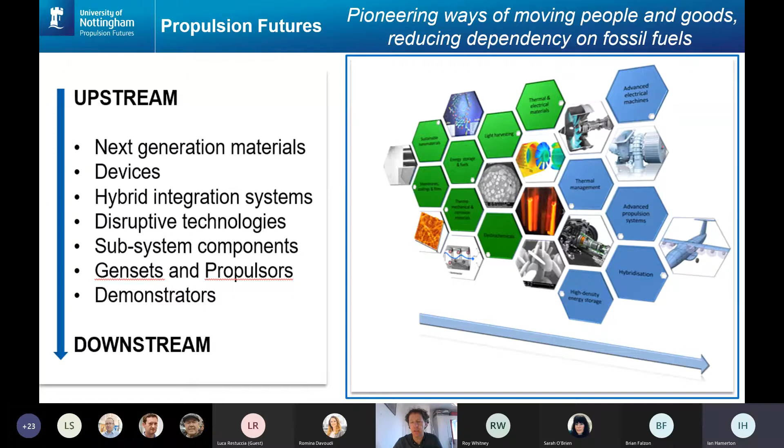So just to give you a few more details about the Beacon. As I said, it's funded by the University of Nottingham. We've recruited several postdocs and technical personnel. You can see some of the facilities here. We're also obviously very closely related with the Power Electronics and Machines building, which is being built on Jubilee campus, if you know the campuses of the university.

That's a big initiative that's going on here in the university. We also fund lots of internal projects, and we also fund prime projects. One of the main objectives from the beacons is to raise funding externally as well, so we provide match funding for those things, and also buy specialist equipment here that's unique to the university and that can help with our research capacity.

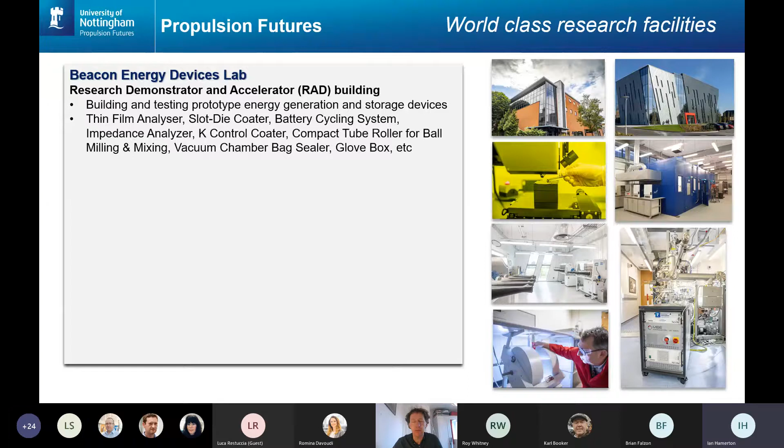Thinking about those facilities, some of those are in the Research Demonstrator and Accelerator building, which is this building up here. And then we've got all of the things you can see listed there. I think especially thinking about thermoelectric materials and battery materials there, we've got some really nice new installations going in. And then there's the Advanced Materials Lab in the ITRC building.

There's the liquid processing platform, liquid plasma processing platform, high energy ball mill, arc melters, resonant mixers and spark plasma sintering. And then more fundamental research facilities in the School of Physics, so an MBE machine there, and also equipment for characterization of nanodevices. And in the School of Chemistry, some facilities for characterization of paramagnetic materials.

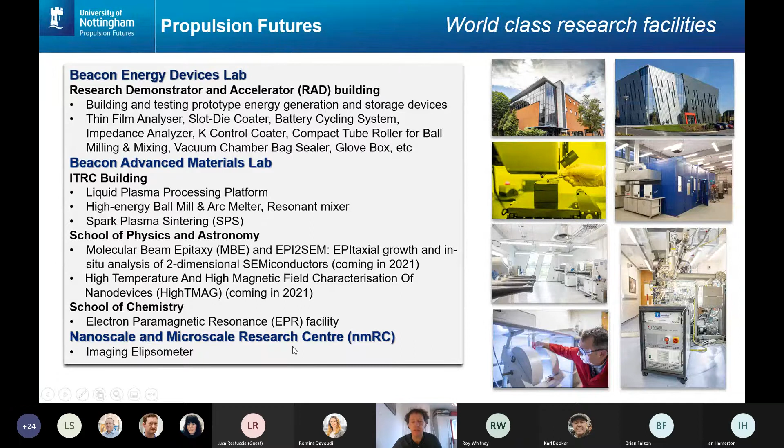And then also here in the university, we've got the nanoscale and microscale research centre, which many of you will know is a multi-faculty facility that acts as a service for all kinds of spectroscopies. And in particular, there's an imaging ellipsometer, which the Beacon funded.

So our aim is to connect, collaborate and innovate. We promote that through targeted seed corn funding, provide access to facilities and provide in-kind support. And those projects are approved through the Beacon board, on which I and Director David Grant sit. That's the governing team there.

So let's quickly get to today's topic. Sustainable materials for propulsion systems is the broader topic. Within this, we're exploring greener materials for propulsion systems and incorporating them with new chemical engineering processes. Those include multifunctional organic and inorganic structures, insulation, conduction, nanostructured composite materials, coolants, membranes, and coatings.

We'll hear today about some of the things going on in the university from some of our academics, and we look forward to those talks. Especially, I'm really looking forward to our guest presentations who'll start now. So that's the end of my presentation.

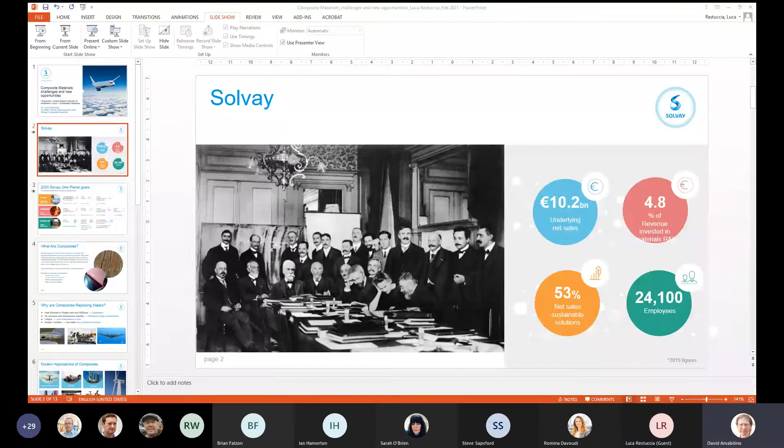So going forward, we can start talking about composite materials now. Let's start with the standard definition. So what are they made of? They are made of two different constituent materials that are significantly different in terms of physical or chemical characteristics. But when put together, they still stay as distinct and separate components, but act synergistically to create something that has much better and superior performance.

So this is a big difference versus mixtures, alloys, or solid solutions. In nature there are plenty of examples, starting from wood, which is made of lignin and hemicellulose. Bones, seashells, granite - nature has already created some optimized structures which are composites. Going to engineered, man-made composites, simple examples everyone knows: reinforced concrete, ceramic matrix composites, up to what is more interesting to us: fiber reinforced plastics, and more particularly in this case, carbon fiber reinforced polymers.

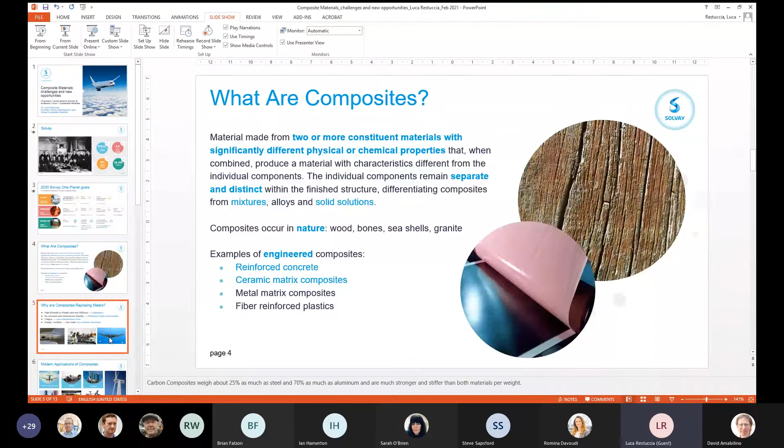So if we look today at the advantages of composites versus metals, and why they have been and continue to replace metals in multiple applications - starting from the more traditional advantages - clearly composites have an extremely high specific strength, which is the strength to weight ratio, and great stiffness. So in general they have really good performance, but at a fraction of the weight of other metals such as steel or advanced metals like aluminum, and this helps a lot in designing and manufacturing lightweight structures.

Now, conversely to what normally happens for metals, clearly they're not subject to corrosion, and they are extremely stable dimensionally, and this allows them to withstand really tough and harsh environments - big changes in conditions from cold dry to hot wet conditions for multiple cycles throughout the life of an aircraft.

They are not very prone to, or they have no fatigue propensity. Now, what this means—we have an example at the bottom of this slide, an infamous picture of an Aloha Airlines 737-200 that in 1988 experienced an explosive decompression and separation of a large section of the top of the fuselage. After investigation, it was linked to maintenance, yes, but also clearly linked to the propensity of the metal to corrode and to fatigue, creating bonding issues at the lap shear level that caused this huge, catastrophic event.

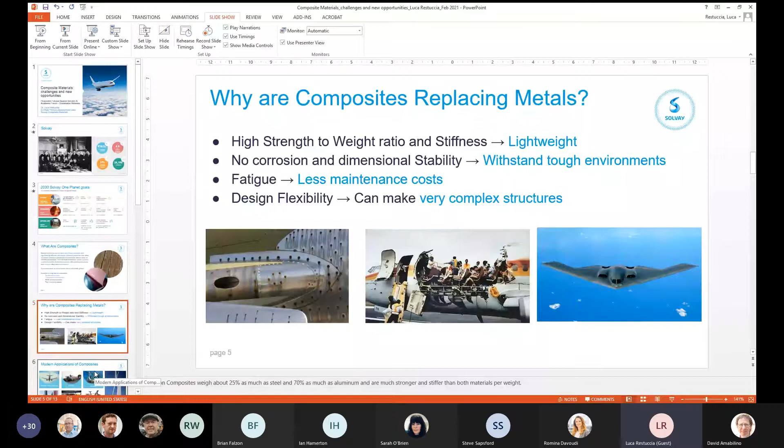All these technological advantages have helped composites earn their way into a number of modern applications. When we talk about modern applications, I'll start with the ones closest to our business, or my part of the business: aerospace, defense, and space. In this case, the traditional advantages of composites really found fertile ground, with a massive and growing adoption of composites over the years.

If we look at marine applications, such as America's Cup boats, stiffness and lightweighting are essential, and people striving to achieve the best performance are looking to composites to be more competitive in these tough competitions.

There is a good portion of composite materials in motorsport and supercar applications. Now, this is clearly linked to the traditional advantages I mentioned before, lightweighting, but not only that. I'll give you an example: composites have unique characteristics—they're really efficient in high-speed crashes and fail in a controlled way. The adoption of composites in specific parts of Formula One cars has dramatically improved the safety of drivers in recent years.

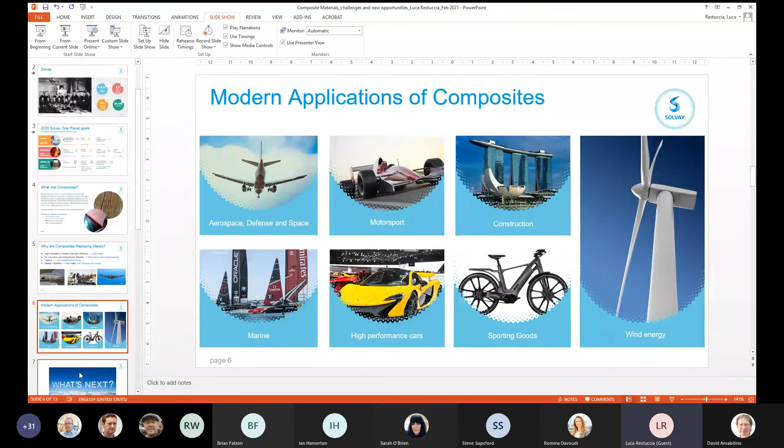But let's see what's next—what can come next. It's really clear in the industry that composites can be an absolute enabler to multiple frontiers of progress in multiple markets. Starting with electric vehicles, whether cars or planes, the ability to make flexible shapes that are lightweight and stiff are all enablers for vehicles currently carrying relatively heavy batteries.

Hydrogen propulsion—there have been lots of talk recently about the use of hydrogen, especially for aerospace applications. This is where composites can really help.

Hypersonics—when we talk about defense, one of the new frontiers of warfare is hypersonic weapons that can fly at 15 to 20 times the speed of sound. This is where composites are a big enabler due to their thermal management characteristics and, clearly, lightweighting.

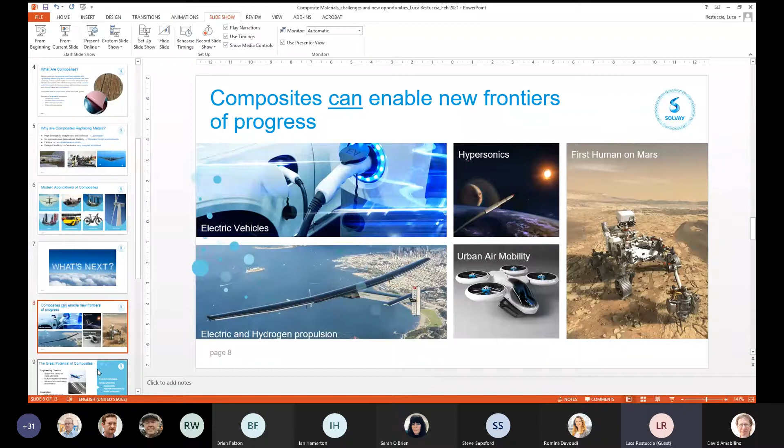Now, we have been talking about enablers for new potential frontiers. So what needs to happen in order to deliver this potential?

Going beyond the traditional benefits I listed before, there are other potential advantages from the use of composites which are either not well understood, used in other industries, or not well utilized by our industry. I can summarize these in two main categories: engineering freedom and integration.

When we talk about engineering freedom, I like to use an example. If we consider large commercial aircraft, the selection of composite materials for wing applications of the 787 or A350 clearly benefits from the use of lightweight products with traditional advantages, but composites also allow creation of aerodynamic profiles that in reality allow these planes to save lots of fuel, among other things implemented.

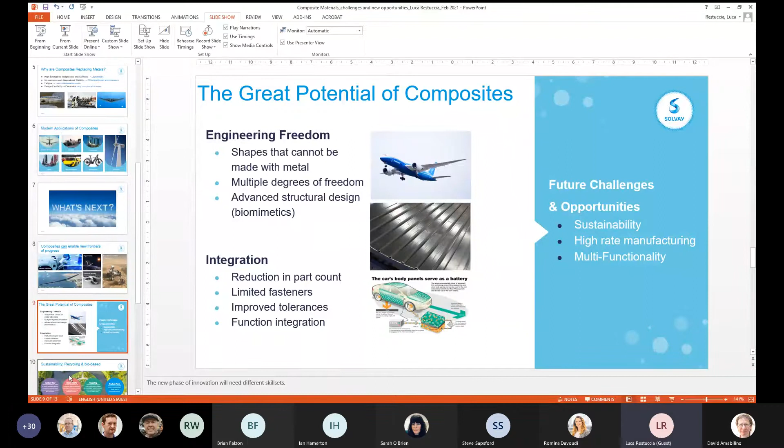I believe only a small portion of all this potential has been exploited today. I'd like to add a bit more to this presentation, talking about future challenges and opportunities, focusing only on a few of them and not capturing them all. I wanted to start from sustainability today, starting from what in our industry is the perceived dilemma of sustainability.

Composites are extremely good for sustainability in the sense that they are lightweight and therefore allow structures to be really fuel efficient. Conversely, by definition, they are really difficult to recycle, especially when we're talking about thermosetting based composites. So in this case, what are the opportunities?

Starting from carbon fibers, there are opportunities to look at biosource or bio-derived precursors for acrylonitrile and polyacrylonitrile, which are clearly the precursor of carbon fibers. Similarly, there are opportunities to look at manufacturing processes for carbon fibers that are a lot more energy efficient. Today's methods clearly require extremely high temperatures and times, and energy consumption is not really efficient.

Then looking to other building blocks in our composite resin matrices, there are opportunities to look for sustainably derived or bio-derived monomers, which can be formulated in order to create the right balance of performance.

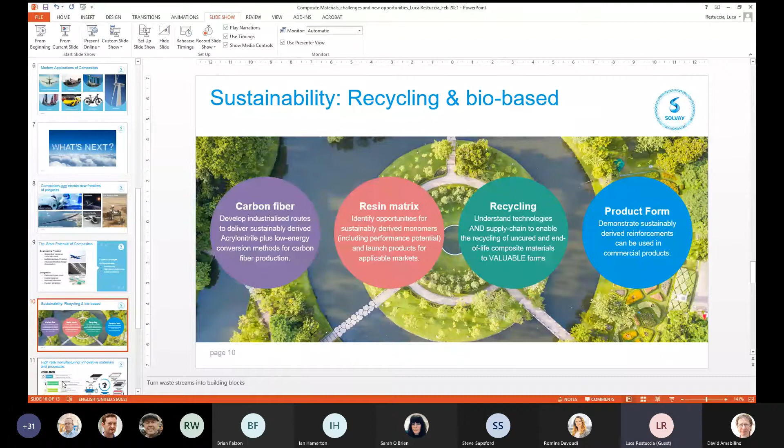Last but not least, we can consider opportunities to create new product forms from recycling or from sustainable sources in order to use them for other applications. For example, potentially turning some of the waste streams from this industry or another industry into usable building blocks. So there are lots of opportunities there.

The second one I'd like to talk about today is high rate manufacturing. Clearly the aerospace industry is rapidly shifting toward an industrialization phase, which will require a real leap change in the ability of materials and manufacturing processes to meet very high production rates.

Materials, in some cases, will have to be capable of very short takt time, and manufacturing processes will have to be fully automated and capable of those rates. So well integration within the cutting, handling, forming, curing, NDT processes in a very well automated process.

So to give you some examples about what Solvay has done in this area, CYCOM EP2750, which is a toughened epoxy system, which has been designed to offer some unique benefits to manufacturers, starting from its high rate capability and ability to be used and developed to be perfectly suitable for fully automated process trains.

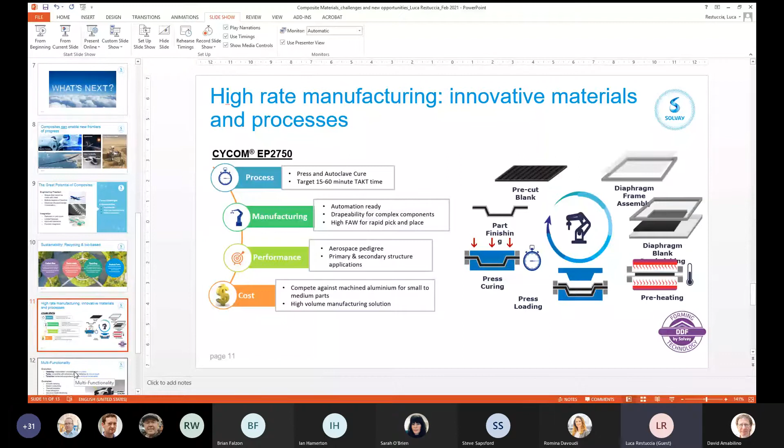The last slide I will share with you is looking at multifunctionality. So if we look at how materials were used in the past, we're talking about monoskilled composite in the sense that the only function was to carry load. Today, through all the level of freedom that I mentioned before, there is the possibility to have materials with enhanced and tailored thermomechanical and physical characteristics, which allow to reduce weight and provide some other advantages to designers.

Clearly, when we're talking about acoustic and vibration damping, composites are inherently stiffer, do behave differently versus metal, and these at times can create discomfort in passengers, in aircraft cabins. Now, some solutions have been developed in that sense in order to mitigate or eliminate that problem.

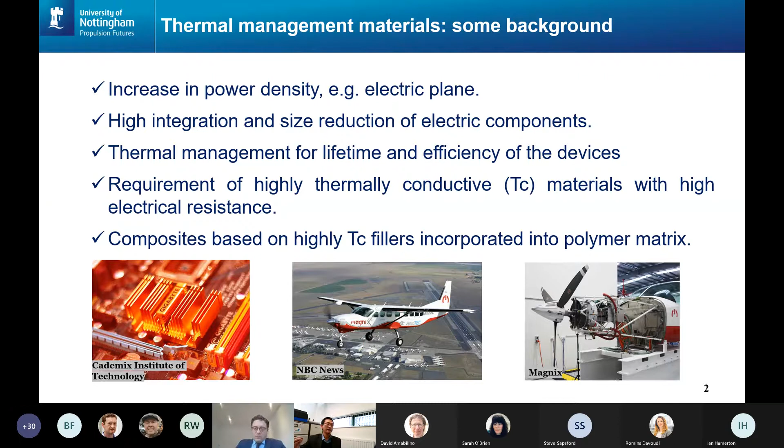So our idea is to think about how to change the polymer matrix by adding high thermal conductive materials. We call them fillers. The key challenge, as I mentioned, is not only high thermal conductivity, but also high electrical insulation. Normally for this kind of application, we need the volume resistance to be around or even higher than 10 to the power 14 ohm centimeter. Because of this requirement, it really limits our selection of fillers, matrix, and also selection of the process.

So our research team is the Advanced Materials Research Team. This is our main group, and it also involves power electronics, the School of Chemistry, and also nanoscale and microscale research centers at University of Nottingham.

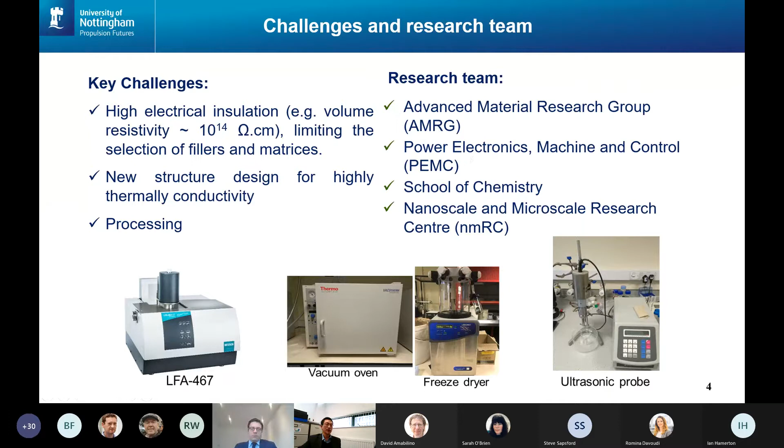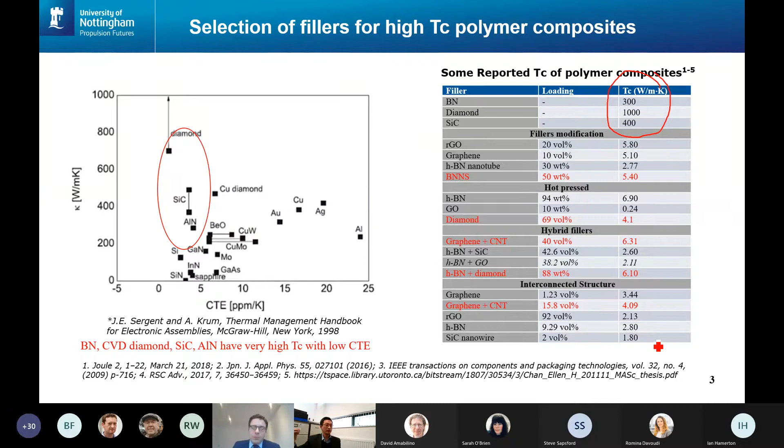So once the filler is added to the materials, it really depends on the distribution and how the different fillers connect. If we think about needing high thermal conductivity, first we need the filler itself to connect with each other, like a bridge, so we can have heat transfer much smoother and more direct, rather than having a gap. Secondly, there's the question of whether we need alignment of the filler or random distribution of filler inside the material.

Here it's very straightforward - with alignment, we have more chance to have a straighter functional pathway and higher efficiency compared to randomly distributed fillers.

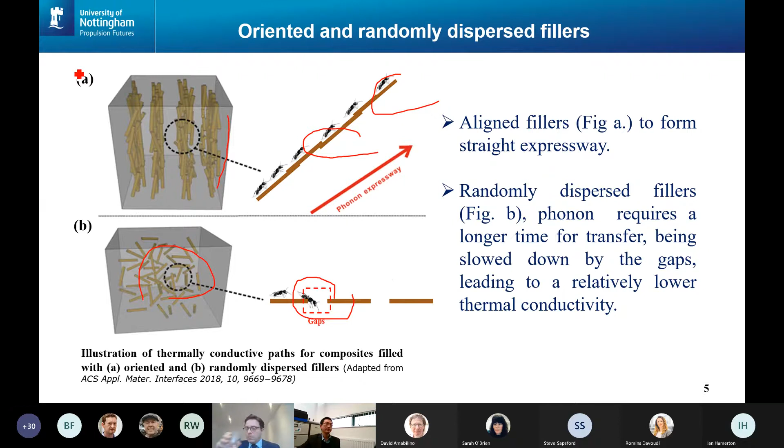So think about how to do this kind of filler alignment. There are different methods that can be used - either using an external electric field or magnetic force, or sometimes people even use a shear force method. If we think about using electric or magnetic field, under this external force, we have to make our filler itself become electric field active or magnetic field active. Then we can do something there, but the problem is that when we introduce additional ions or additional particles, that will affect its electrical resistance.

So another way is to use this shear force method. The most popular shear force method is melting the polymer, or dissolving and dispersing these particles inside the polymer, then doing extrusion together. That can help with alignment of the filler, but one issue is that the contact between fillers is difficult to control.

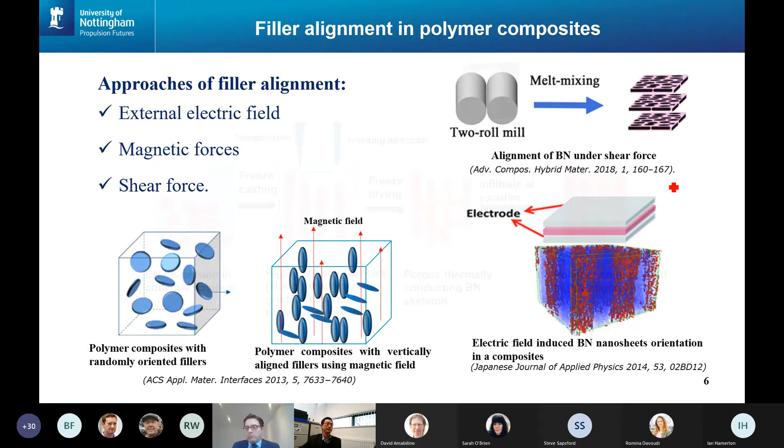So the method we chose is called the ice template method, or sometimes also called the freeze casting method. First, we try to produce a dispersion of hexagonal boron nitride - putting these boron nitride platelets inside a water-based solution. After that, we put this container in a very cold chamber, and at the bottom of the chamber it's cooled by liquid nitrogen. Then we can create a temperature gradient, with the bottom very low and the top slightly higher. Because of this high temperature gradient, ice starts to grow from bottom to top, in the direction of ice crystal formation.

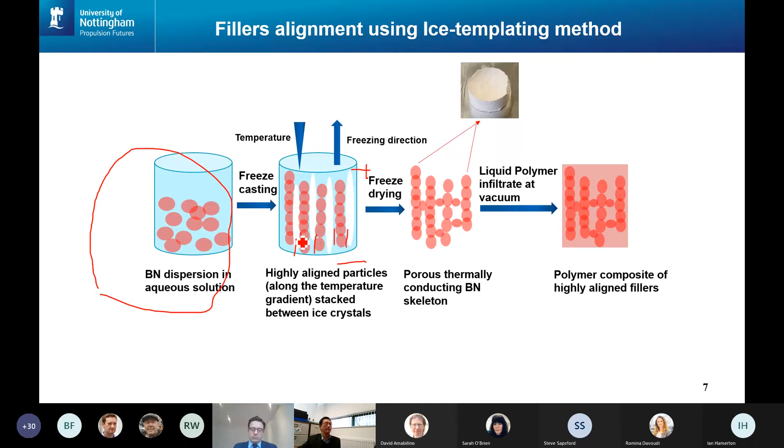During this procedure, the particles placed inside can change or slightly tailor themselves to fit the ice crystal, and finally the alignment is achieved. So this is how it works.

These structures we call aerogel. After certain treatment, we can get this very porous aerogel structure. You can see here its alignment of boron nitride platelets. Here is an enlarged image along these directions.

After that, one way is we can directly do impregnation with polymer, for example epoxy. As you can see here, this is a randomly distributed skeleton plus epoxy, and this is aligned boron nitride plus epoxy.

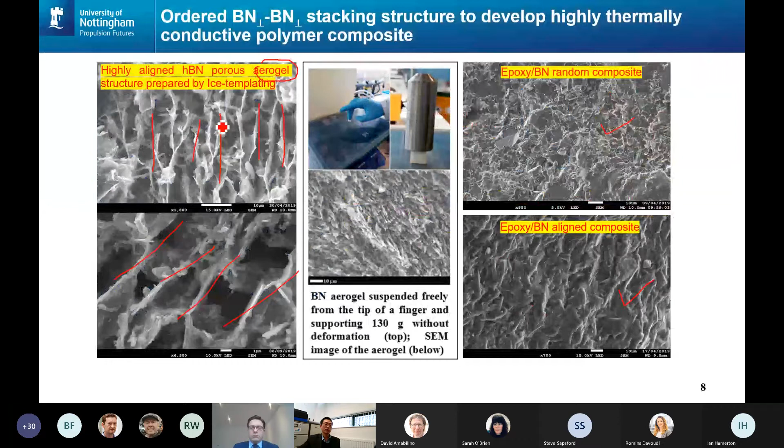But we think of this as just physical contact, as shown in the image. So we considered whether we can make it more solid. One method is to try a little sintering of this porous aerogel structure, to link the interface or boundary more strongly. Under this temperature, interfacial diffusion happens, linking the boron nitride platelets together, which increases thermal conductivity significantly.

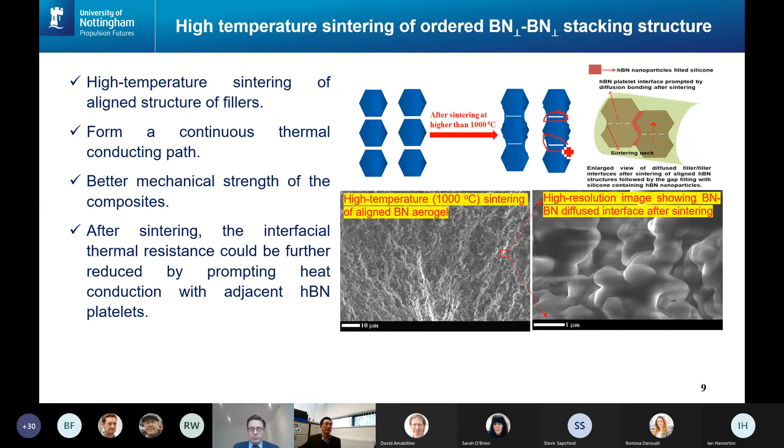Here is the data comparison. The black color represents epoxy filled with boron nitride in a randomly distributed composite. If we change it with a little alignment, you can see the difference. This is with 18% volume fraction.

This is one method. Another method is sintering this aligned boron nitride skeleton. Especially at 1000 degrees, you can see it makes a huge difference, increasing from about 1.2 to approximately 3.

To promote sintering, another method is to add some nanoparticles. These nanoparticles stay at the interface of the big boron nitride platelets. During sintering, the nanoparticles help diffusion bonding between the two platelets. Finally we achieve a value of 3.5 watts per mK at 32% volume fraction, while also maintaining electrical insulation, keeping volume resistance slightly higher than 10 to the power 14 ohm centimeter.

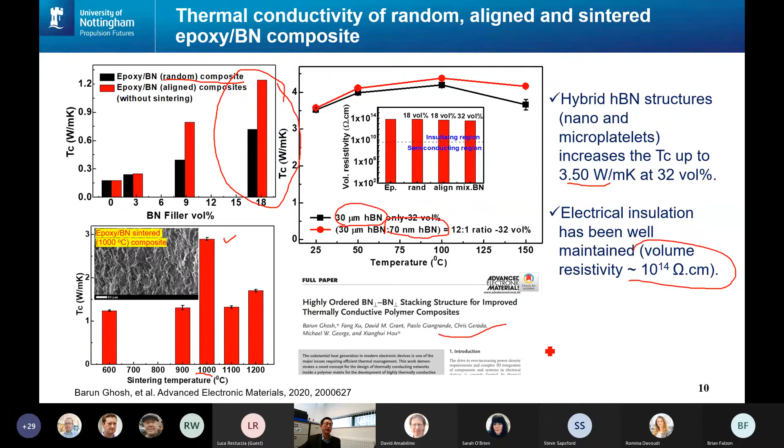We have a recent publication on this. This method is mainly for bulk materials. We've also developed another method for large scale, flexible membrane or film formats. We combine a few layers of silicon carbide and boron nitride together. This design achieves very good thermal conductivity while also offering very good dielectric properties, much better than commercial polyimide films.

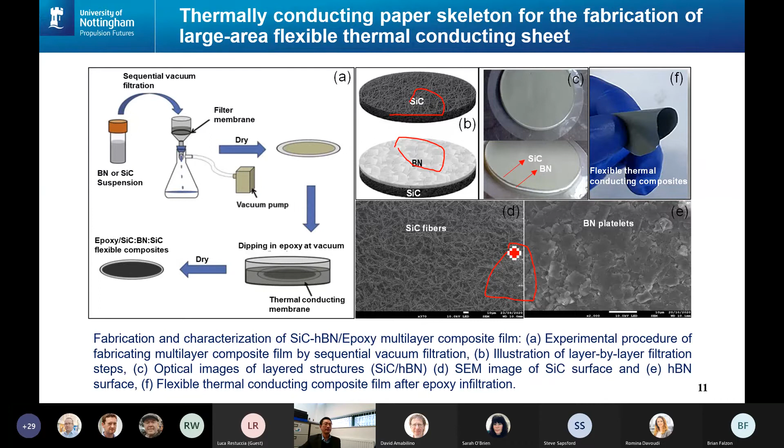This work is still under development and has not been published, so I won't report particular data here, but if you're interested you can email me. In conclusion, two types of thermal conductivity materials have been replicated. The main story is trying to reduce the interfacial thermal resistance of these porous structures, either by sintering or by adding thermal conducting substance at the joint positions.

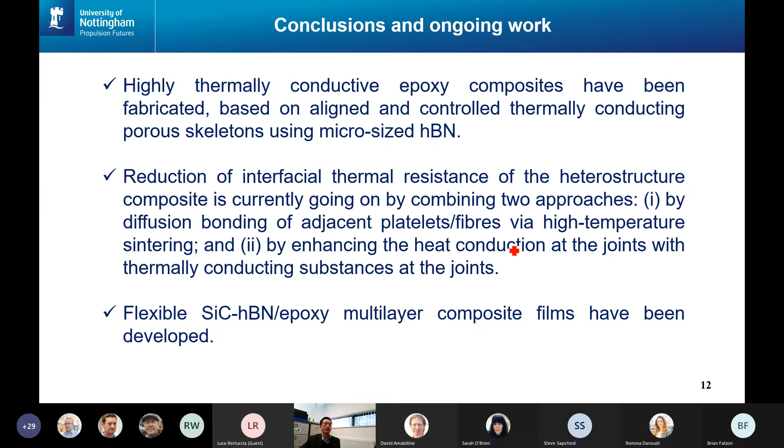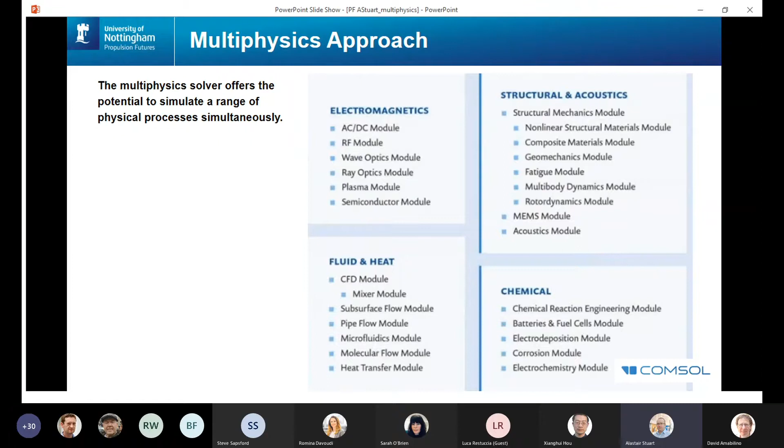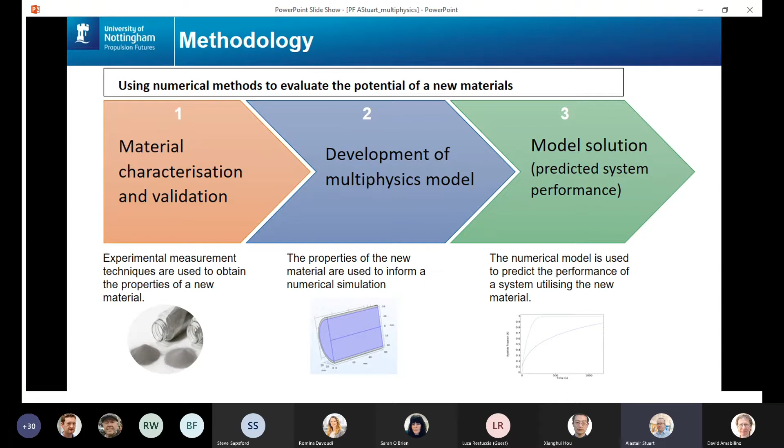So apologies for that. Just to quickly recap, I've shown here on this slide the physical processes that are available in this particular package. There are other packages you can use, and there's a list there of what can be applied in terms of the mathematical modeling. I think this is the slide I'd got to, so I was explaining the methodology in which you would characterize a material. You would then develop a multiphysics model, and that would give you a solution which would allow you to then think back about how that material would perform in a specific application.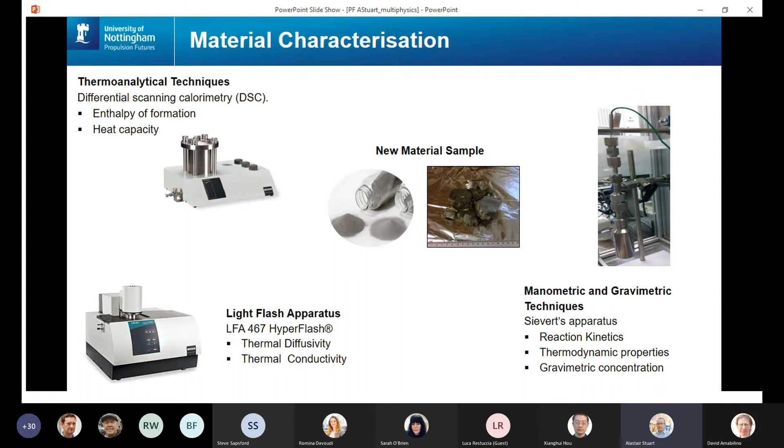And then this is a reaction of this alloy with hydrogen - we're going to store hydrogen in the alloy. So we're interested in the reaction kinetics and the concentration of hydrogen that can be obtained. Using these experimental techniques, we can characterize the material, which gives us material properties. I would then set up a model in a solver.

I'm showing on the right-hand side my material placed in a metal container, which I've connected to a hydrogen source, perhaps an electrolyzer. There's a flow rate of hydrogen coming into the material, and the material is designed to react with the hydrogen and become bonded. This is a way of storing relatively large amounts of hydrogen in a small volume, so we're thinking about energy density here.

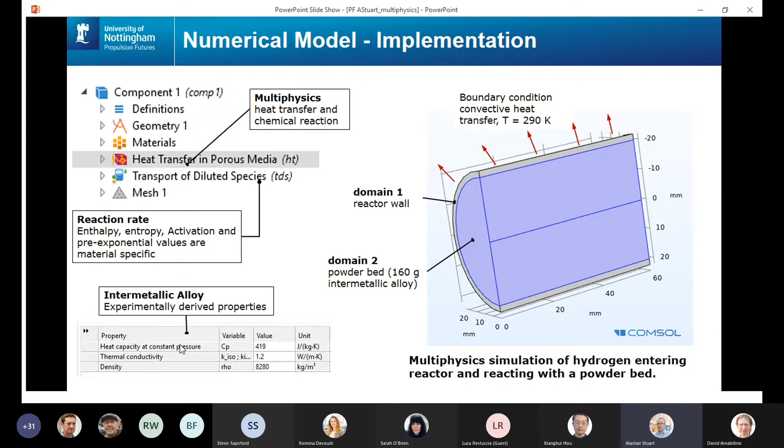I then go on to obtain a solution. On the left-hand side, the solver has predicted what will happen as the hydrogen transfers into the container. It reacts with the alloy and becomes bonded with the metal, and as it does so, the concentration of hydrogen in the alloy is increasing—that's this blue curve I'm showing over time. I've called it hydride fraction, but it's essentially the concentration of hydrogen, and you can see it has a particular shape.

What's happening in the container? There's a temperature difference. I've given you a plot of that, and through this temperature scale you can see it's hottest in the middle, and as we get towards the walls of the container, it's reaching the cooling temperature, which was about 20 degrees, about 290 Kelvin. The solver is revealing how the material will perform. I've not had to make the material or build a prototype, but so long as my inputs have been correct and I've used the physics correctly, I now have some idea of the potential of this material for this application.

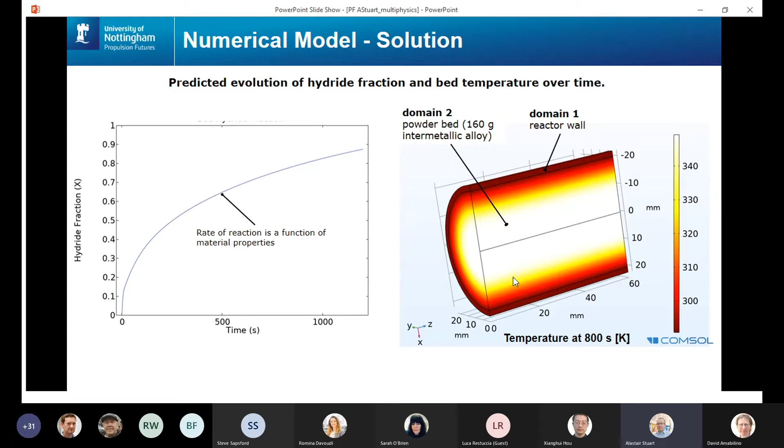I can see here that there's an issue of heat transfer—this reaction is very slow, and I might be trying to meet a certain rate of hydrogenation, because I'm coupling this container to, say, an electrolyzer. So I can then think about how to improve this.

For this example, I'm going to use some fins, made out of ECOPHIT F, which is an expanded natural graphite. Fortunately the manufacturer has done the characterization of the material already, so I'm showing some properties here. The important ones for us are in the middle: thermal conductivity at 20 degrees—in the plane it's 190 watts per meter Kelvin, and through the plane it's 5 watts per meter Kelvin.

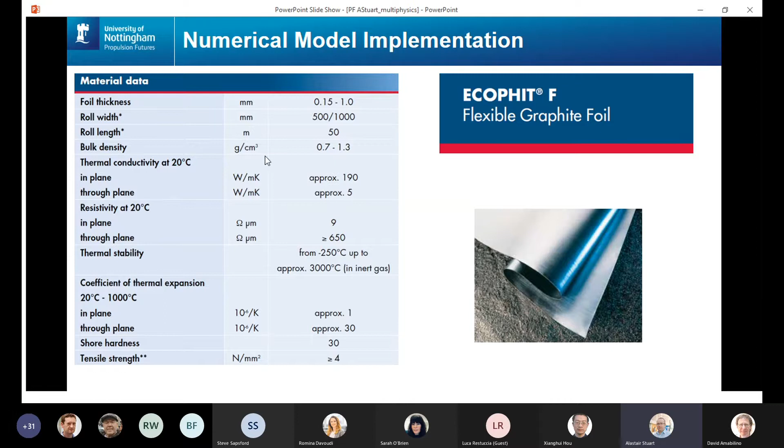So I can embed that into the solver now as a new material. On the right-hand side you can see my container—these grey partitions are the fins, embedded through the powder bed at 8mm intervals. I've identified them as a new domain: domain number 3 is the ECOPHIT, now part of the model.

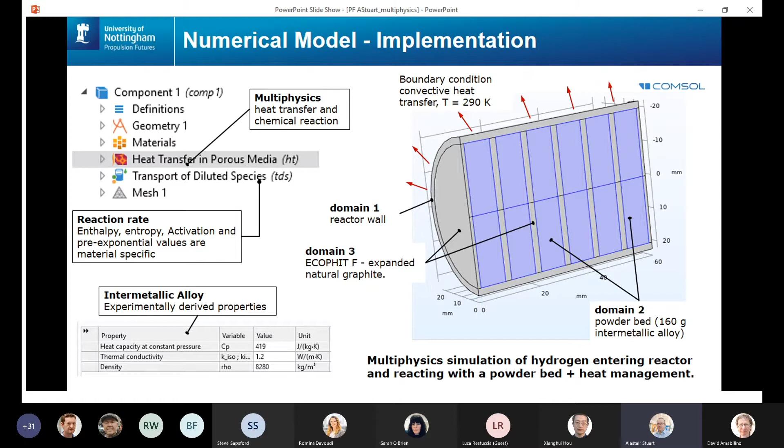The solver will now run the same simulation, but with the introduction of fins. If I go to my next slide, you can see the impact of those fins along with the alloy—I'm using the same alloy, and I've plotted both curves here.

So the original curve, when it was the powder only, is in blue, but we now have a new curve in green, and this is where we have introduced some heat management in terms of the fins. The fin properties are enhancing the thermal properties of this hydrogen store, and it has accelerated the speed at which the reaction takes place because it's managing the heat.

The heat's allowed to disperse to the surroundings of the store, and we've got this much faster reaction taking place. Again, I've shown the cut through for temperature just to show you that you can interrogate the solution and get all kinds of insights. It's a three-dimensional solution, so that helps you visualize what's taking place in terms of heat. You can see we still have hot spots within the powder, but where the fins have been placed, they are performing the role of a thermal bridge to the outskirts of the reactor.

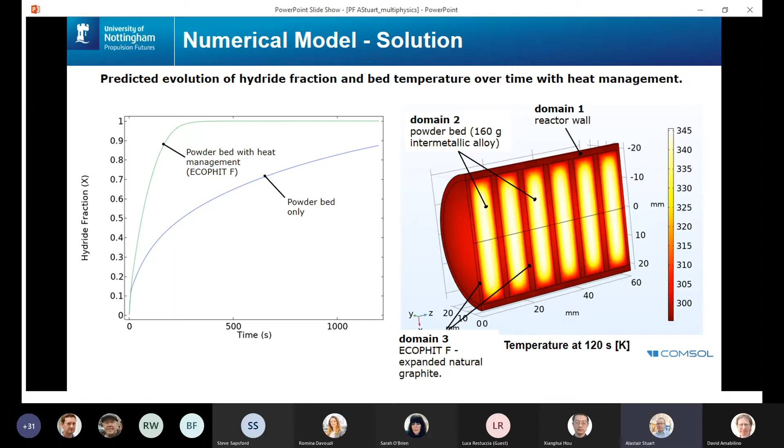So we've done this without actually building the prototype. We haven't had to make more material. We've pursued a simulation, and we've used the material characterization to build the simulation. And this is quite a basic representation. You could have much more complex geometries, and you could dream up some quite involved scenarios, but the methodology would be the same. So just to recap then, what I've said is that you may see a multiphysics solver as a way of exploring the potential of a material.

This could cover all aspects of physical processes. It could be mechanical, it could be electrochemical, it could be heat transfer, and it could be a combination of all of these. In my example, I was combining heat transfer with chemical reaction, but you could get quite complex simultaneous solutions with this method.

Characterization of a small sample of the material allows you to predict or explore the material's potential in a larger system without having to commit time and resources to building the system. And that was the methodology, those three steps that I followed.

There are some limitations, and that's quite important to recognize. The numerical model is limited to the material properties that you've measured under certain conditions. For example, the expanded natural graphite that I used, its properties were measured at 20 degrees. And I'd have to make an assumption, or ask the manufacturers, do those properties change if my store operates at, say, 100 degrees? So there are limitations you have to recognize in terms of how you gain your material properties.

The other limitation that is quite important is you're extrapolating the material behavior onto a larger scale. It might be that when you increase the scale of that system, other properties occur that you're not anticipating. This is a real problem we have come across in our own work. So there's a caveat there: although you're simulating a larger scale system, you have to be wary that there are other behaviors that might occur that you're not going to glean from your characterization.

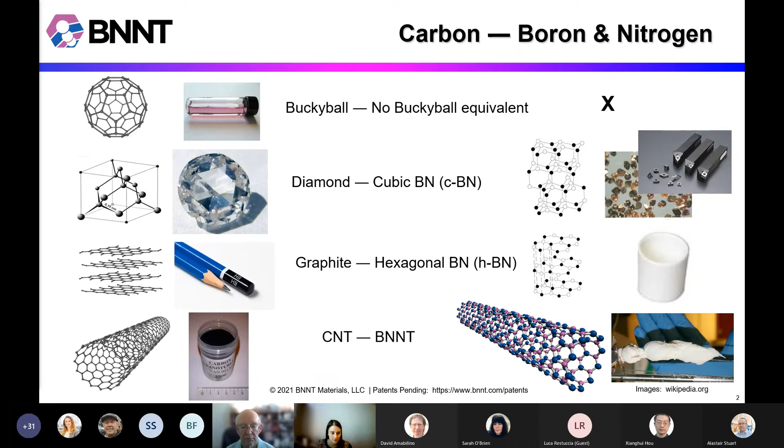We can also process this material into various form factors — dispersions, powders, or what we call mats, which is just the BNNT analog of a carbon nanotube bucky paper.

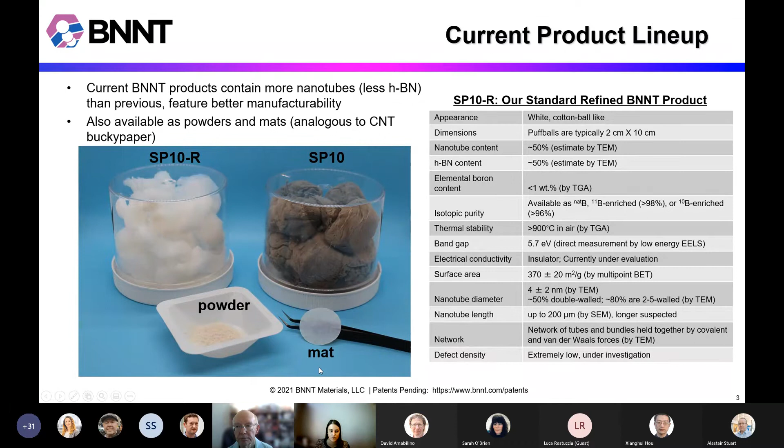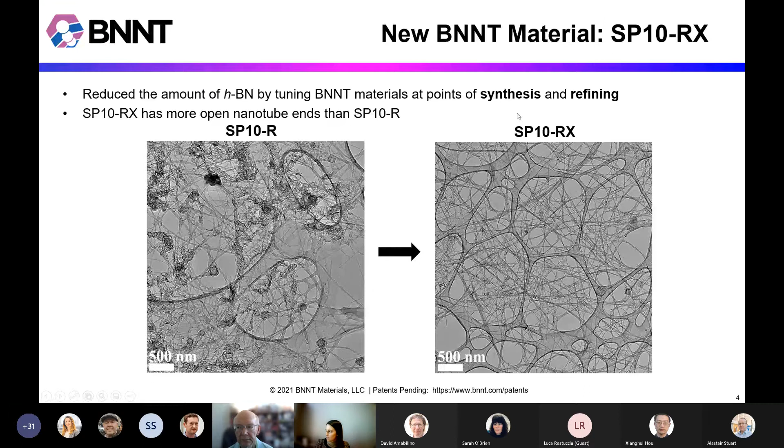The team included Mike Smith, who's our chief scientist now — he was at NASA at the time — Kevin Jordan, our chief engineer who still works with Jefferson Lab, and Cheol Park, who was at NIA and is now at NASA. In their centennial year, they're being recognized for the invention of the year: these nanotubes.

This was a significant achievement that NASA and DOE invested significantly in to make happen. So what we have now is the first and only commercial facility that's non-government. Some nanotubes are made at other facilities, but we're really the only commercial facility doing this.

We also have the first and only pilot plant, brought online this year. We now run multiple rigs in production across multiple shifts, and we can tailor many of the materials — taking them to different stages with different synthesis parameters.

The overall question you asked, David, when we first chatted, was how efficient is this. We've moved from $50 million lasers with advanced techniques down to very commercial setups with modest CapEx, and we have the most efficient production and the highest rate per unit energy of anything going on at the moment.

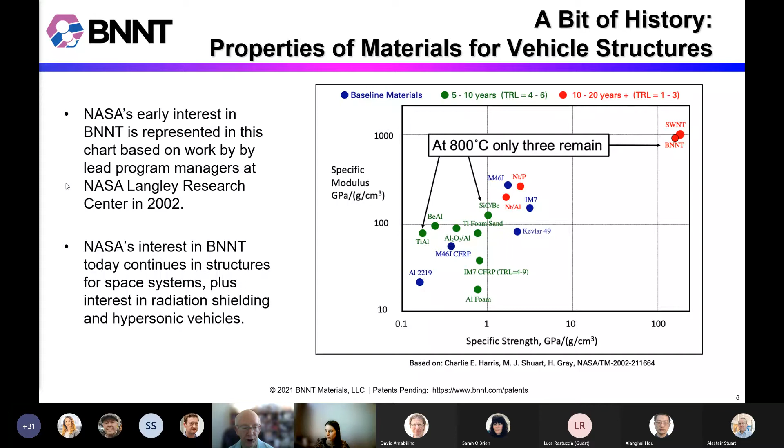Boron nitride nanotubes have a very high strength to weight ratio, making them very useful for aerospace composites. They can make those materials more lightweight. They can increase the service temperature because of their high oxidation resistance, make parts more durable, and increase their lifetime and wear resistance.

So what we're working on is, as Roy mentioned, both partnering with our collaborators and also doing work in-house to support a lot of composites work, as well as neat structures such as fibers and yarns. Composites might include metals, polymers, and ceramics.

There's also a lot of, we talked a little bit about multifunctionality today. BNNTs have the ability to kind of be that next gen material because of this host of different properties they have, in addition to their strength, their thermal conductivity, low CTE, oxidation resistance. They're electrically insulating, and they also have the ability to contribute to radiation shielding.

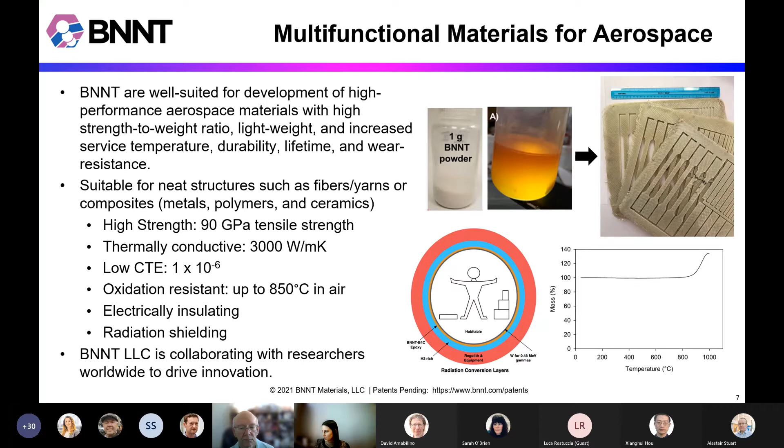Starting out with metals here, to talk a little bit about some work that's been done with material that our company produced, is some work with titanium MMCs out of Florida International University by Arvind Agarwal. He used a unique method to actually disperse the boron nitride nanotubes in titanium.

And he saw that the higher temp process actually gave him better results. They attributed that to the presence of some of these decomposition byproducts at the grain interface, which actually helped the bonding of the tubes to the Ti64. That's some recent work out of there in 2020.

And then also there's been some work on aluminum by Hitachi Metals in Japan. This comes out of a patent a couple years ago. This work was actually not performed with our boron nitride nanotubes, but I still thought it was interesting to include.

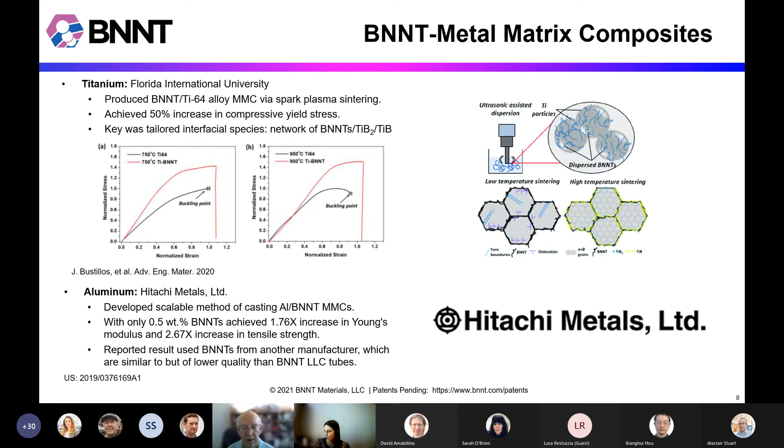Moving on to polymer composites, we have a collaborator with the Navy out in China Lake, California, who's working on electrospun fibers, particularly PAN, which of course is a precursor to carbon fiber. So they're working on...

They've actually, I think, improved this weight loading even further beyond the 20%.

Another example of some work with polymers is out of the State University of New York, Binghamton, Xianghui Hou. He's actually doing some more fundamental work to understand the interface strength of a boron nitride nanotube and a polymer.

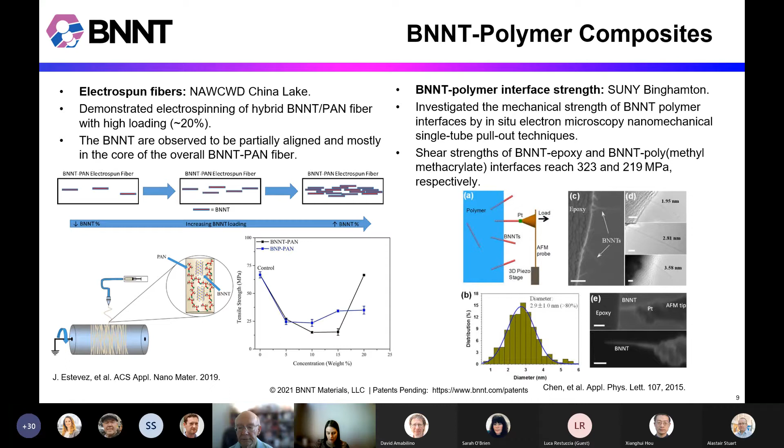Something else we're working on in-house is thermal management. Boron nitride nanotubes have extremely high thermal conductivity and electrical resistivity. On an Ashby plot, they'd be way off the chart. We're partnering with collaborators and also doing work in-house. We've got an ASTM D5470 thermal tester, making different thermal interface materials and testing them, as well as working on anisotropic thermally conductive fibers to use as reinforcements. This work is funded by the Office of Naval Research, and we've had favorable results by adding small amounts of boron nitride nanotubes to different composites.

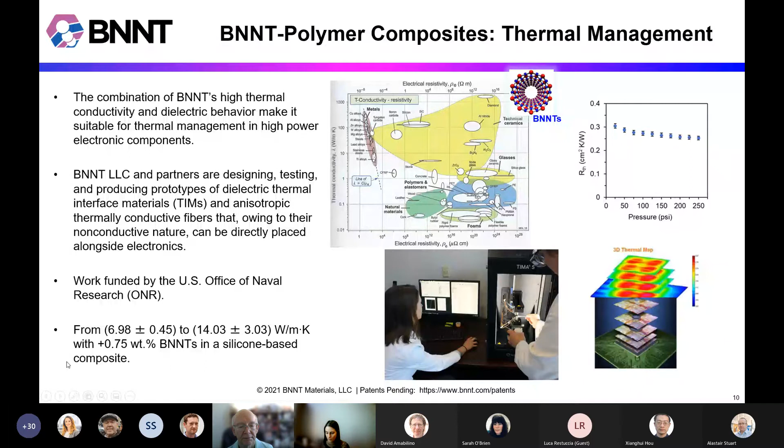To summarize, we have a pilot plant in full production. We can tailor these forms of materials so we can adapt them to make things best for putting into various composites. Different composites prefer different fibers and materials, and we can get them into fibers to some degree. These are all active R&D components, and we're actively working with multiple collaborators to advance these technologies now that we have the capability of supplying material in the quantities needed for the type of TRL advancement of great interest to people looking to get to final products.

Lyndsey: Yes, so we're pursuing all kinds of specialized applications for filling nanotubes, which might be possible because we've found that some of our new processing methods are able to open the ends of the nanotube. That's opened up a new world of applications for us, as well as composites and additive manufacturing. Aluminum seems like it will be really interesting because the BNNTs survive the casting process, especially for the thermal conductivity and thermal management project we're working on as well.

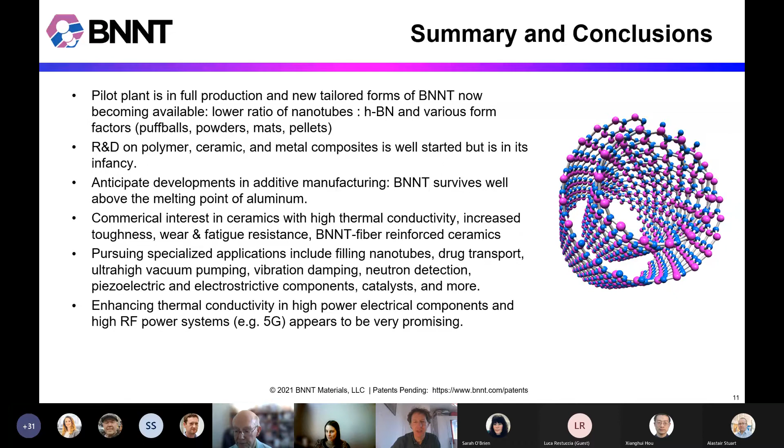So the first one is from Thomas Turner, who's going to talk to us about challenges in carbon fiber recycling and reuse. Hi, Tom. Hello. We don't have a share... Yeah, let's see if I can cross the first hurdle. Okay, how's that? That's great, perfect.

Wonderful. Thanks very much for inviting me to speak today. My name is Tom Turner. I work within the Composites group here at the University of Nottingham. I'm going to spend 10 minutes talking through some of the challenges associated with sustainability and high performance composites, particularly for aerospace structures, and then show some of the work going on here at Nottingham which hopefully provides solutions. Very grateful to Luca for setting the stage nicely at the beginning, talking about the big advantages of composites in aerospace, and he alluded to some of the complexities of recycling and reuse. We'll talk about those a bit more now.

So where are we from a sustainability perspective in aerospace composites? We're talking primarily about carbon fibers embedded in an epoxy matrix or other high temperature thermosetting matrix. There's strong motivation to use these materials, as we've heard, because the potential weight saving in aerospace structures is very significant. Historically, aerospace hasn't had to cope with massive legislative pressure on sustainability, whereas now we see increased pressure and public perception of these issues. So within composites, things are ramping up, and more people are getting interested in composites recycling and reuse. The materials involved are varied—there are many different waste streams from both production scrap and end-of-life parts in aerospace, and what we'd really like to do is find ways to reuse them.

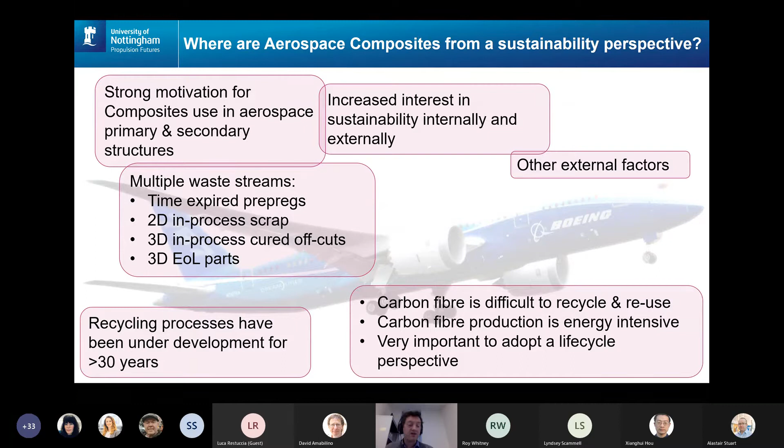So our focus is looking for solutions on how we can reuse materials that come from primary or secondary structure in aerospace—can we reuse them internally, in things like interiors or tooling? You'll see examples on this slide of a seat back demonstrator we made with Boeing a few years ago, and a galley door panel demonstrator.

These are nice applications, but they're not really going to reuse the full volume of material that's going to come out of aerospace one day—it won't get that back into aerospace. Tooling might be another opportunity, where there are large parts without enormous structural requirements, so we may be able to use some fibers there.

But another opportunity might be taking carbon fiber from aerospace and putting it back into automotive. That could really help because automotive is struggling from a cost point of view with carbon fiber, even though they like the weight save potential, and there's also a general shortage of material. So there's an opportunity to reuse carbon fiber composites from aerospace back into automotive, looking at something like an aluminium replacement material.

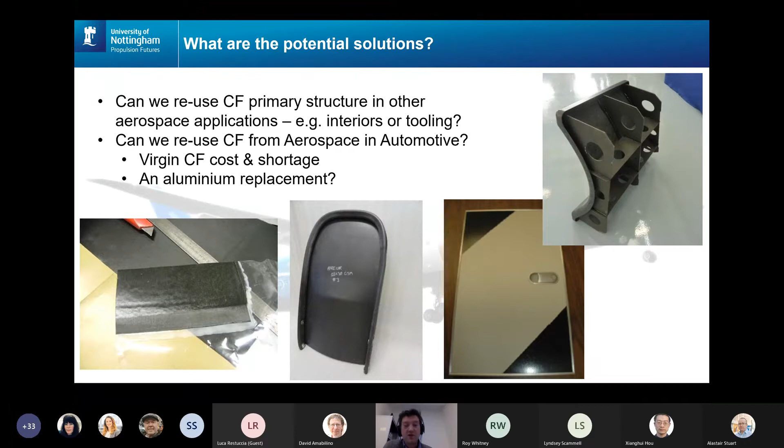So the big problem with composites recycling is that the form of the material changes from the virgin material, which looks something like this—several kilometers of fiber on a bobbin that you can put into your manufacturing process. When it comes out of a recycling process, it looks something like this instead. So we're going from something that costs maybe 20 to 50 pounds a kilo for typical aircraft grade fibers, to recovering something that's only cost a few pounds a kilo, but has a really different form.

It's not like aluminium recycling or glass recycling, where the material that comes out of the process looks like the material that went in. We can't recover continuous fibers, so the fibers we do get are short, variable in length, really fluffy, and quite entangled—a bit like black cotton wool, but itchier.

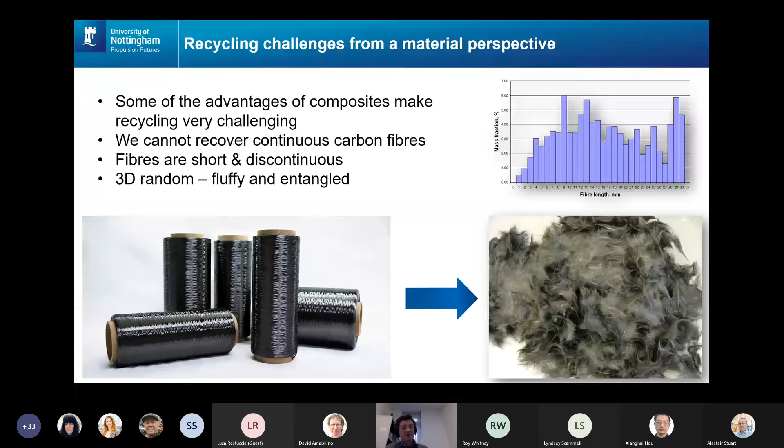What this means is we're not going to be making aircraft primary structure from recycled fibers, because aircraft primary structure relies on having unidirectional continuous fibers made up into layers, and we're just not able to restore that form of product and get it back into new aircraft. So this raises some tricky issues for us when we think about recycling and reuse.

Just to show a couple of things we've been doing at Nottingham, quite a few different areas. One of my colleagues, John McKechnie, is very interested in life cycle modelling, and has done a lot of work into this, taking material from one area and reusing it in another.

Over the years, we've developed several recycling processes to get the fibres out of end-of-life composites or in-process scrap. On the right-hand side is one of those processes, the fluidized bed process. This is in our Aerospace Technology Centre, a photo of a rig we built in collaboration with Boeing to demonstrate this process to sort of TRL 5 or 6. We've also developed other processes which can recover resin constituents rather than just the fibres, but there's no work on those at the moment.

The area I'm really interested in is this reuse area. It's one thing producing the fibres, but how do we get them back into materials we can use again, preferably in processes that are already established and understood. The difficulty is coming up with a suitable intermediate format that we can get back into components, maximizing mechanical performance, minimizing added energy, to turn that fluffy ball of fiber into something we can actually use.

The biggest problem with these fluffy fibers is that they have excessive loft, a bit like cotton wool. If you squeeze it, you can't really achieve that high packing fraction of fibers that you want in order to make a high performance material. Typically you would want about 60% fiber volume fraction. If you just take recycled carbon fiber and squeeze it, you get about 10%. If you squeeze it really hard, you might get 20, but then you're starting to break the fibers and reduce your mechanical properties that way.

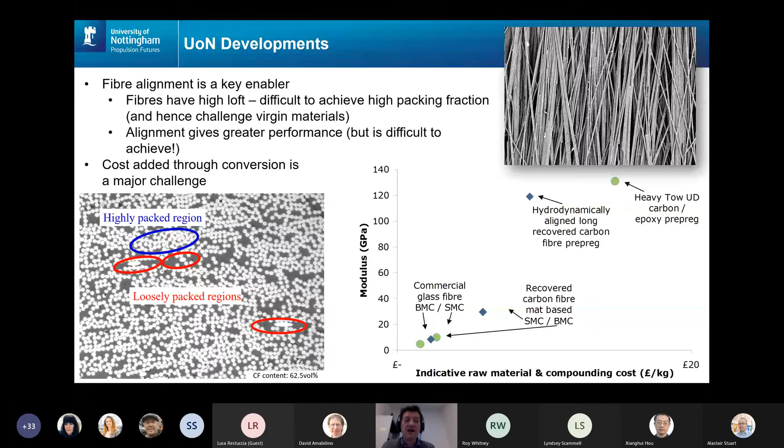So we think fiber alignment is a really key enabler. We've developed a process here that disperses the recycled fibers in a liquid, and then we use a hydrodynamic effect, a sort of convergent flow process, to realign the fibers and make them look more aligned in top view or side view. We're looking at fiber alignment not really to get higher performance in this direction than the transverse direction, but to get higher packing so that we can get more of these fibers into our composites. But cost, energy, and labor added through that conversion process are a big challenge.

That's a very quick introduction to some of the stuff that's going on here. I'd be very happy to talk to anyone about it at a later date. But where are we going next?

I think probably we're going to see an increase in pressure to increase sustainability for composites, and certainly we see more projects coming through looking at this area. Personally, our goals are to scale up these processes to determine energy cost whilst doing incremental enhancement to make the gap between virgin carbon fiber and recycled carbon fiber, from a performance perspective, even lower than it is.

But there are some really big problems associated with commercialization. At the moment we're stuck in a bit of a rut where there's this increased perception of a big problem in the future, but it's not really reflected either in quantities of material coming through for recycling or in R&D spend. So we're just on the cusp of a solution. The technology solutions are probably there. It's just a case of funding and scale up, and maybe getting something into a large scale automotive solution that might trigger further research.

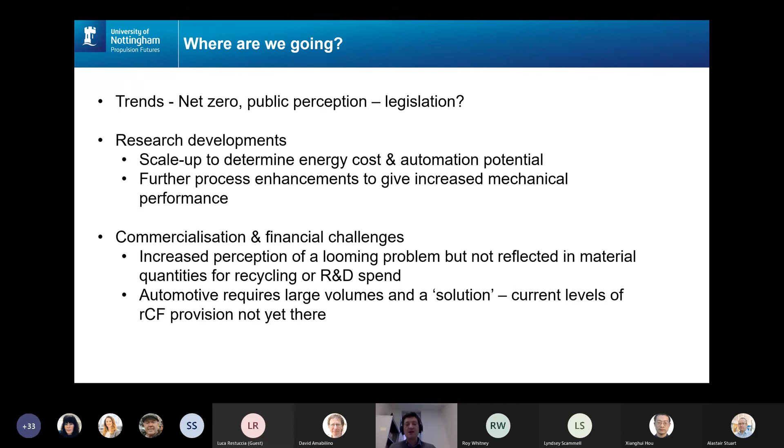Thanks very much for your time. Happy to answer questions at the end.

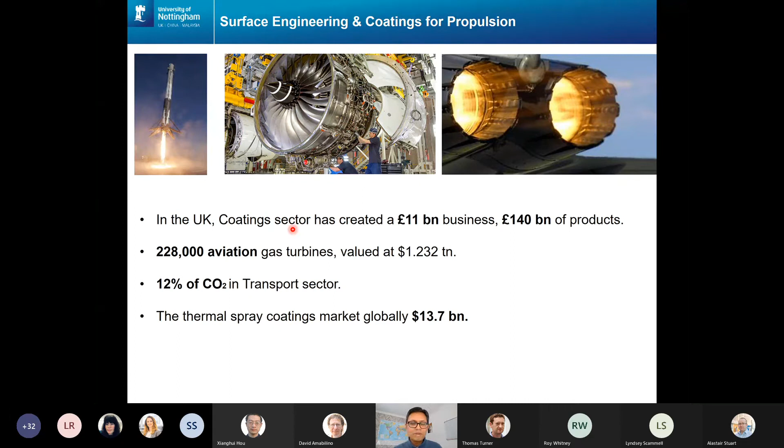One of the ways we can do it is a broad group of technologies called thermal and cold spray. Globally, the thermal spray coatings industry is around $13 billion. So what we're looking at here is a center of excellence at Nottingham University.

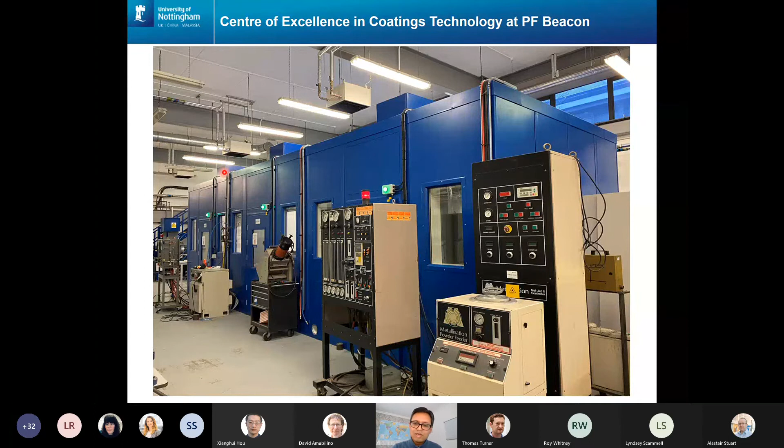This is part of Propulsion Futures Beacon. This is a brand new facility with 3 spray booths: one for all combustion-based systems, anything which burns like a small rocket engine; another for plasma, temperatures as hot as the surface of the sun, 10,000 degrees Celsius; and another for cold spray technologies. As I go through my presentation, I will give you some examples of how we have been using this for making metal matrix or ceramic matrix composites.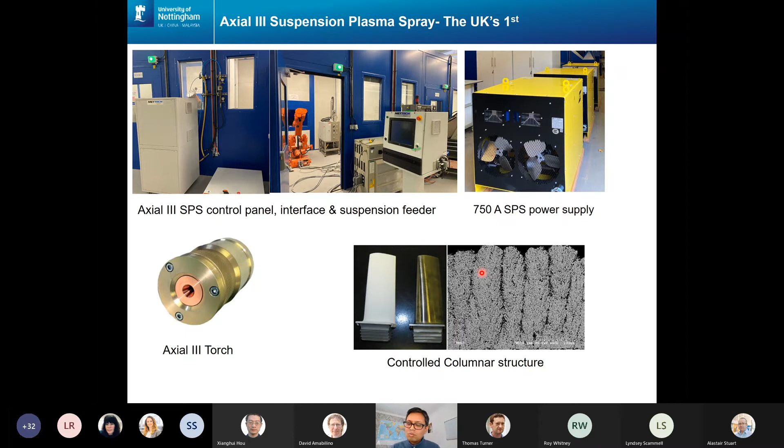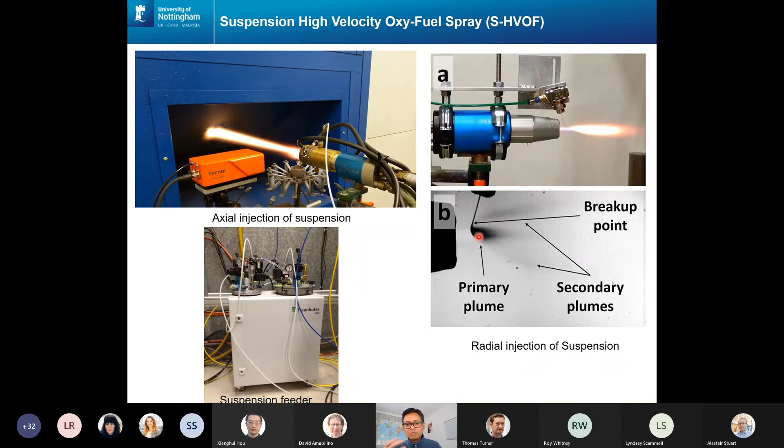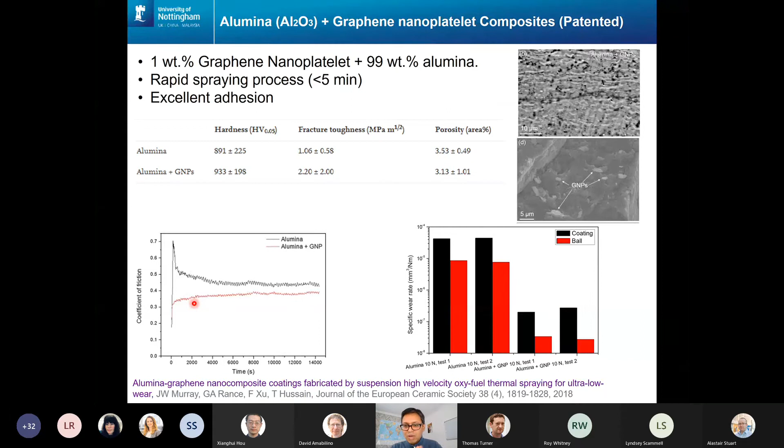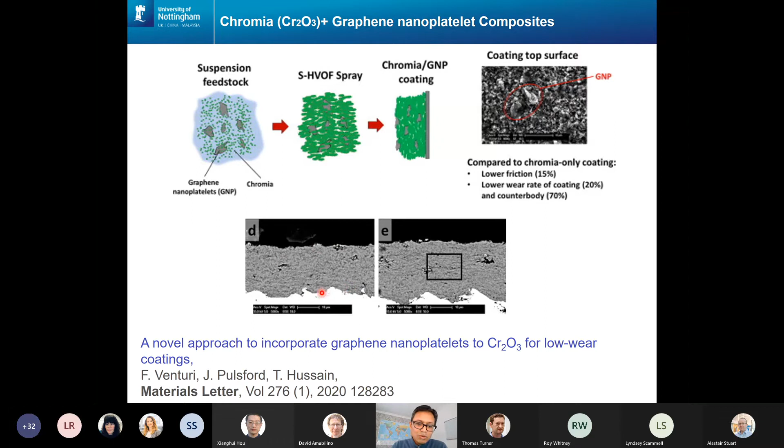This can lower friction by around 15% in that system, and wear rate on the coating by 20%, and on the counterbody, in this particular case alumina, around 70%. So by making simple composites based on ceramic, the performance can be enhanced significantly. These are some of the microstructures, scanning electron images, showing the robustness and uniformity of these coatings.

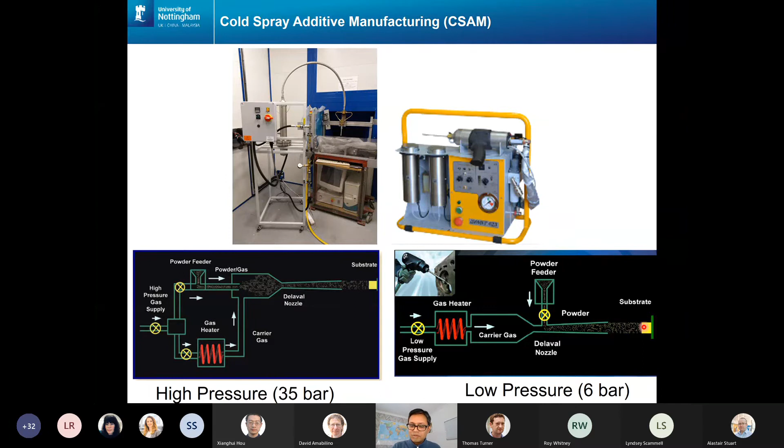Similarly, in a low pressure cold spray, we also add a ceramic component. When these particles exit the nozzle, it starts producing that metal ceramic mixture. You can start making several millimeters thick deposits using this cold spray additive manufacturing.

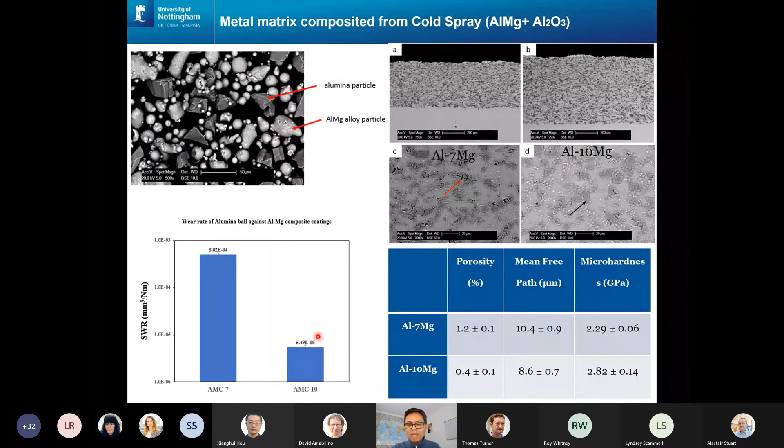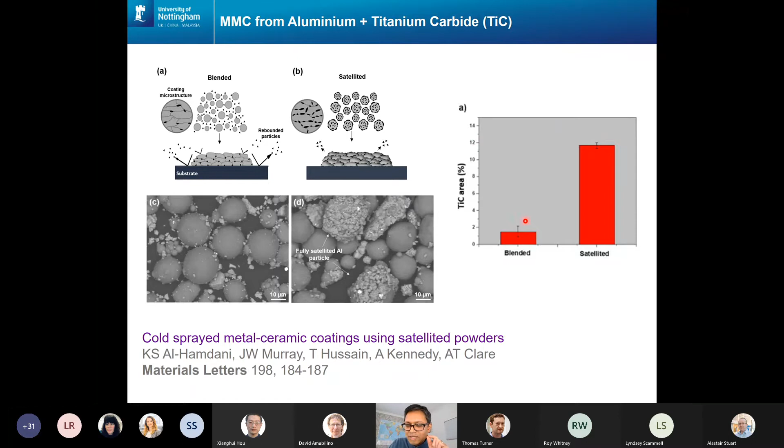We can also do another technique called a satellited process, where we make the satellites very similar to one of the presentations you've seen from Florida International University's work, where we have titanium carbide around those metallic particles, and we can then spray it, and that's how we incorporate the ceramic into that MMC. When we do that in a satellited system, our retention is around 12%, and in a blended system it's around 2%. So there's quite a significant jump by altering the process.

I'm conscious of time, so just to capture it: innovative manufacturing processes are here at Nottingham to make the CMCs, and suspension plasma spray is one of the unique ways. That's the UK's only suspension plasma spray facility to make aerospace grade CMCs. And MMCs from cold spray is a new way of producing MMCs without going through the multiple stage process. It's a single step process. You can deposit it in less than 5 minutes. And a whole new range of compositions and microstructures are available for applications like thermal barrier, environmental barrier, or electrical applications. Thanks very much for listening.